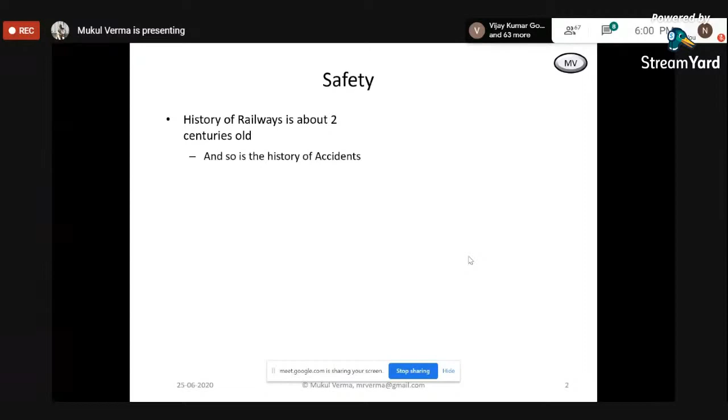This was the first train in the world which ran between two cities, and it met with an accident. So accidents are part of all modes of transport. Our endeavor is always to minimize the risk. What is risk? We will see. Risk is a combination of severity of an accident and probability of accident.

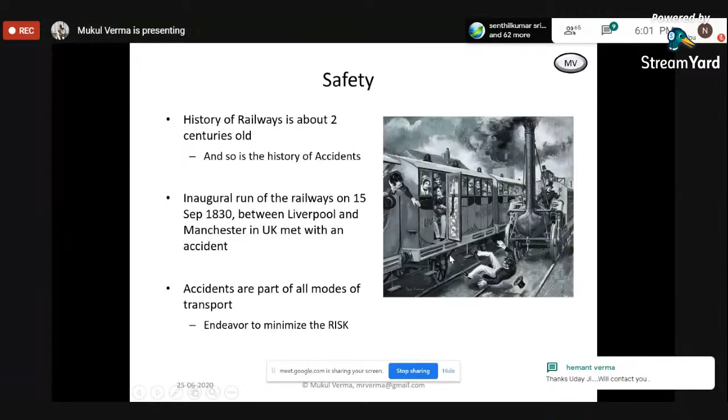So we will see some important issues on safety. That is, first thing is, what is safety? We will try to define safety. Can we quantify safety? Well, why do we need to quantify it? Unless we quantify, we don't know where we are and where we have to go. Have we improved? So to measure all these things, it is important to measure safety.

As Dr. Chaturvedi in the previous session said, we have to quantify quality. Similarly, safety has been quantified, and we will later on see that it has been quantified into 4 levels universally for all modes of transports, whether it is road vehicle, whether it is aerospace, or whether it is railways. This is safety integrity level 1, 2, 3, 4. And the level of safety is decided based on the severity of consequence of accident.

Next question is, can we achieve 100% safety? Well, answer is no. There is some accepted level of risk which has to be taken depending on the society. Every society, every country has its own minimum accepted level of risk, and safety is only an insurance that you will not have more than the small amount of risk that you have already accepted.

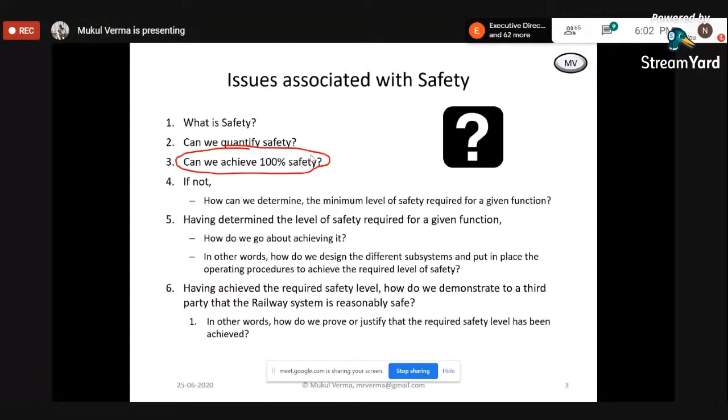Well, if 100% safety is not possible, then how can we determine what is the amount of safety we need for a function? For example, in the railways, there are different functions like signal clearance, giving command to the interlocking system, and so on. For this, our safety standard CENELEC provides guidelines to decide what level of safety is required for which function. We will see about CENELEC later.

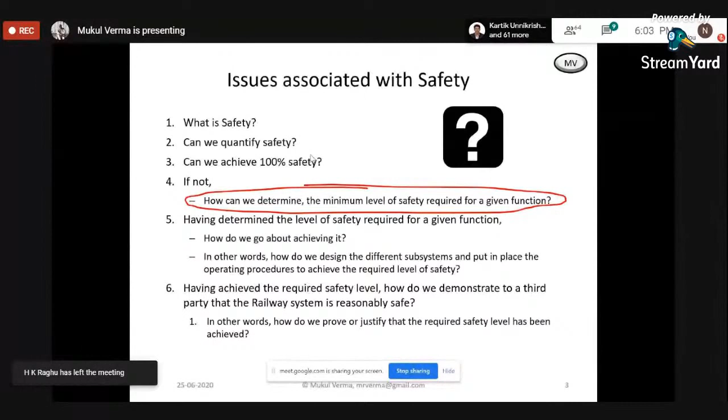Then, having determined the safety level, how do we go about achieving it? In other words, how do we design different subsystems and operating procedures to be put in to achieve the required level of safety? Again, CENELEC comes to rescue, and CENELEC is, well, not universally, but at least in India and Europe, the Bible for railway safety. So CENELEC gives the guidelines to decide how to achieve a given safety level.

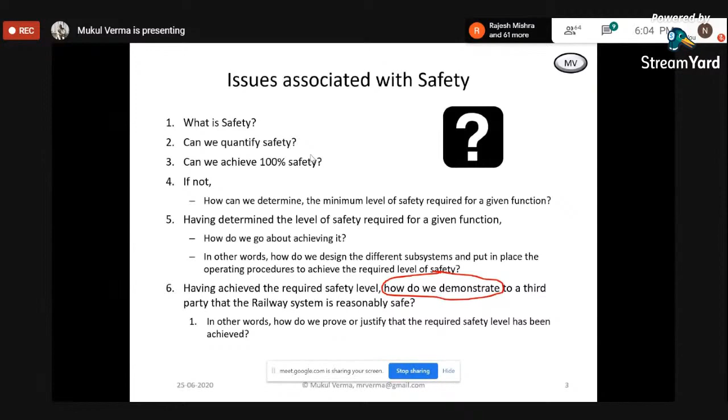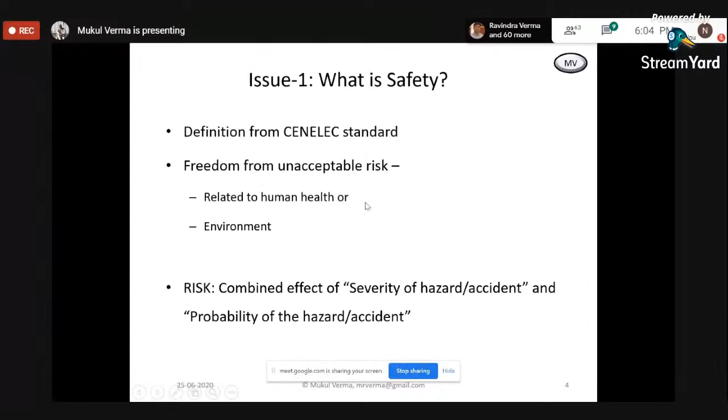And having achieved the safety level, we have to show to the customer or to the public at large that we have achieved this safety level. So CENELEC provides the guidelines how to achieve and how to demonstrate the safety level. So issue number 1, we will see what is safety. Safety has been defined in CENELEC in just a few words: freedom from unacceptable risk related to human or environment.

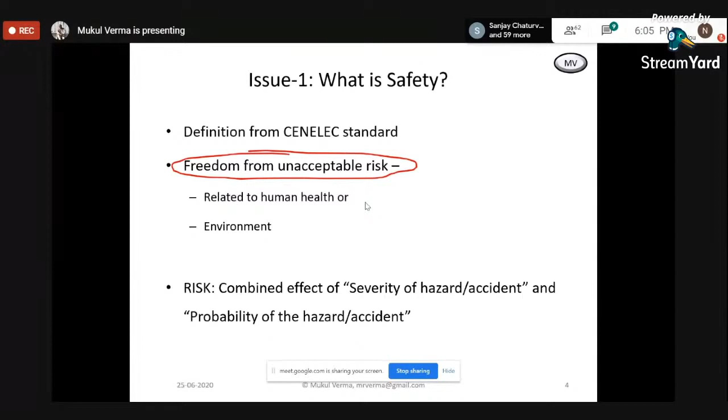Now, there is a key word here. This is unacceptable. That means, as we discussed earlier, some amount of risk has already been accepted by the society. And when we talk of safety, we only make sure that we don't increase the risk beyond what is already accepted by the society. And we have seen earlier that risk is the combined effect of severity of hazard or accident and probability of the hazard. Well, hazard is a technical term. Hazard is a situation where there is a possibility of an accident.

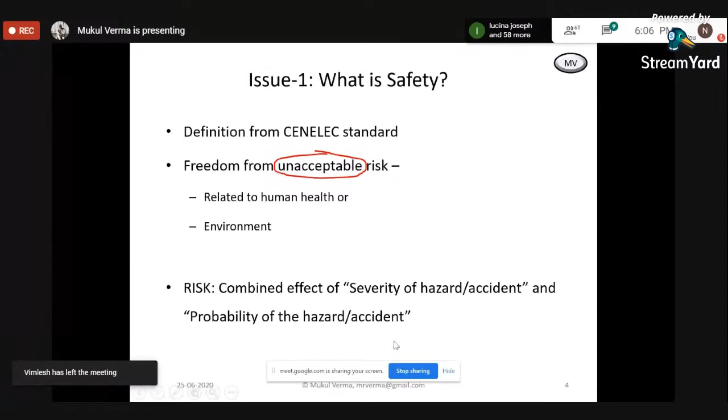So let's say in plain words that risk is the combined effect of severity of an accident and probability of an accident. If the severity is very huge, then we have to reduce the probability of that accident to the acceptable level. We have talked about CENELEC. Here, I would like to spend a few minutes on CENELEC because this is very important for the railway engineers.

CENELEC has got 4 standards. The first is EN 50126. This is for railway applications. This is for the complete railway domain, whether it is signaling, rolling stock or track. 50126 applies to the complete railway application. It has got part 1, which defines the RAMS process. So this is not only for safety, this is for reliability, availability, maintainability, and safety. And part 2 deals particularly with safety. So these 2 parts are applicable to the complete railway domain.

Then there is another standard, that is 50126 part 3, which is a guide to the application of 50126 to rolling stock RAMS. This applies only to the rolling stock domain. Apart from this, there are 3 standards which apply to signaling systems. 50129 particularly provides the guidance for electronics hardware as well as the system. I have seen 50129 being applied to rolling stock also. So people have started using this for rolling stock also.

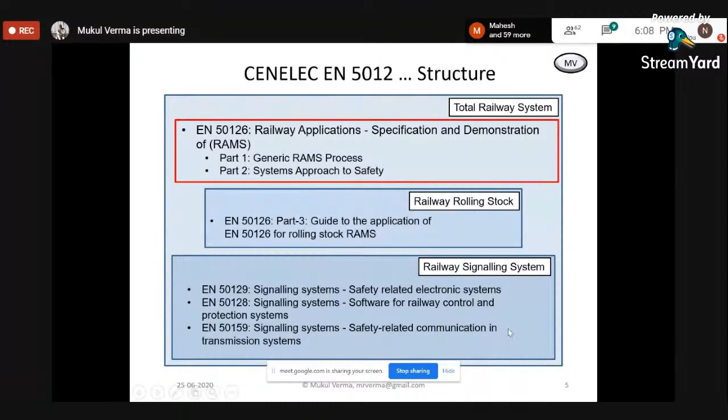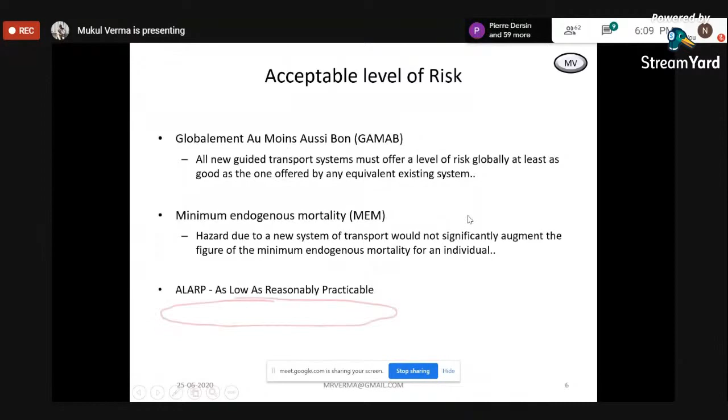Then we come to the acceptable level of risk. We have talked that every society has got its own acceptable level of risk. It has decided, and the risk should not be higher than this acceptable level. There are various methods various countries have applied. Generally, the most popular one is as low as reasonably practicable, the ALARP method. This is a very popular method, and in India also we are following this method. We will see how this method is applied.

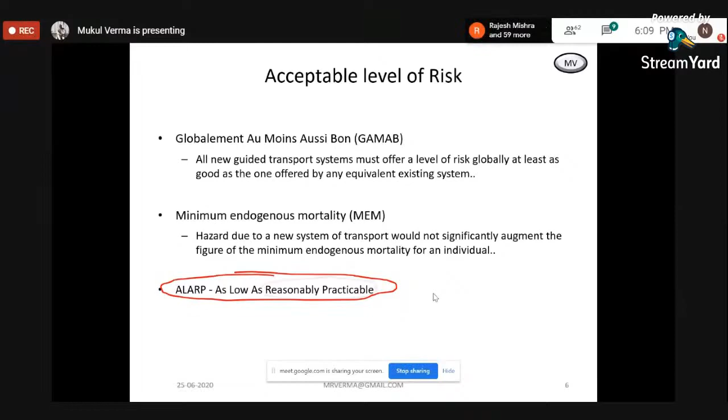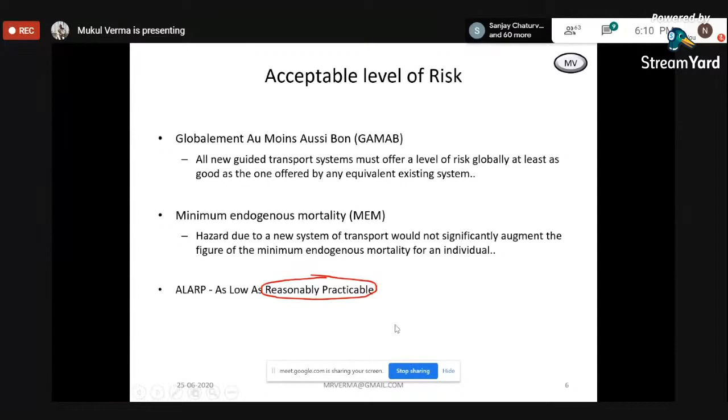Here also kindly see the key word, that is reasonably practicable. Again, the risk is not to be reduced to 0. We need to reduce it to the reasonably practicable level, which is acceptable to the general public.

Next issue is safety quantification. I mentioned that safety has been quantified into 4 levels. These are level 1, 2, 3, 4, highest being level 4. So for any hazard or any accident, we look at the most possible severity of the accident. For example, suppose there is a hazard in which conflicting signals have been cleared for two trains. There may be head-on collision, there may be side collision, or there may not be any collision at all if there is no train. So we look at the highest possible severity, and that is head-on collision.

Since this cannot be accepted, its probability has to be brought down to a very low level, and that is given in CENELEC as less than 10 to the power minus 8 per hour, which is about 1 in 10,000 years. Similarly, for other things, for example, doors of a metro train opening in a moving train is not a good thing. It is not acceptable, but the consequence is not as severe as the other one. Probably this is assigned safety level 3 or 2. This is a subjective matter, and the probability of its occurrence is reduced to less than 10 to the power minus 7 or minus 6, and so on.

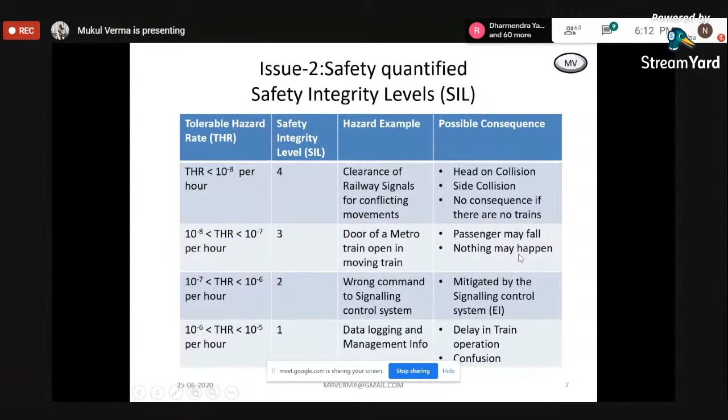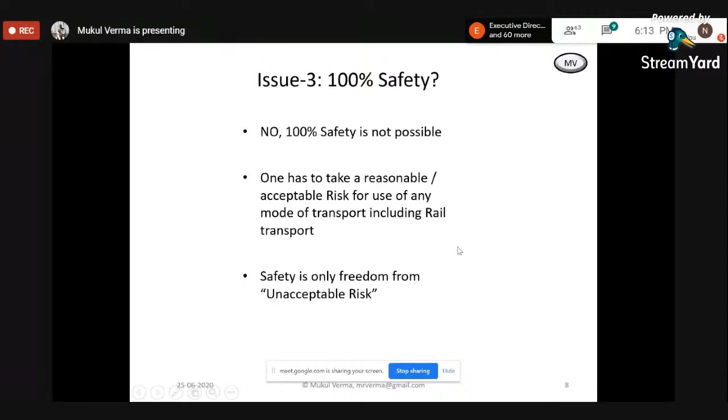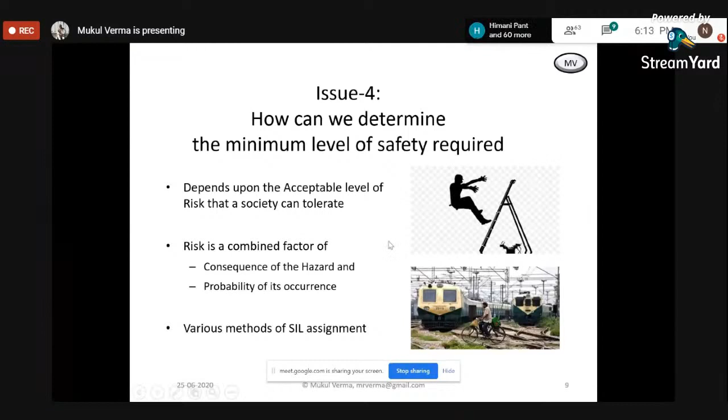Well, issue 3 we discussed was, is 100% safety possible? This has already been answered. No, 100% safety is not possible. Some minimum amount of risk has already been accepted, and we can bring down the risk to that much amount. The next issue is, how can we determine the minimum level of safety required? Well, we have seen some methods of determining the minimum level of safety, and one of them was ALARP, which can be applied for determining the safety level.

Now we come to how to achieve the required level of safety. Again, CENELEC has got such guidelines. If you follow those guidelines, you will achieve the safety integrity level. For example, for products, it has given a quantitative requirement, which we saw for SIL 4 was 10 to the power minus 8 per hour. We have to bring the probability of such failures to less than this. And there are some qualitative requirements. In the example of metro rail, the safety is allocated to different subsystems, for example, signaling, rolling stock, etc. And each subsystem is required to demonstrate that the required safety level has been achieved.

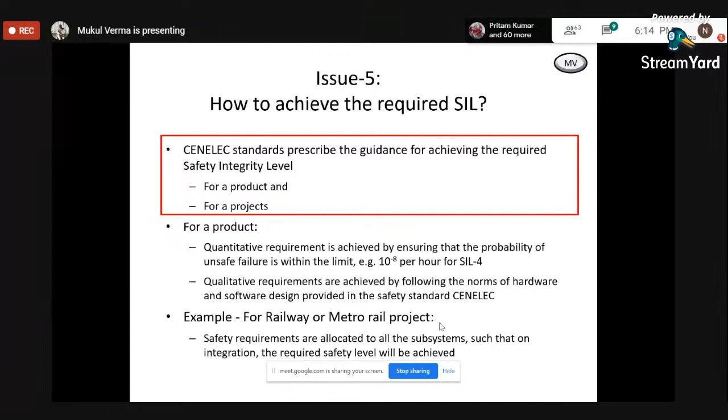Then the last issue was, how do we demonstrate that the required safety level has been achieved? Well, all documents have to be prepared. You have to give a justification. You have to calculate and show that the probability of failure has been reduced to 10 to the power minus 8 per hour for SIL 4, and maybe 10 to the power minus 7 for SIL 3, and so on. Documentary proof for quantitative requirements as well as for qualitative requirements, that you have followed all the guidelines, for example, that a safety audit has been performed, that your design engineers are well qualified, etc.

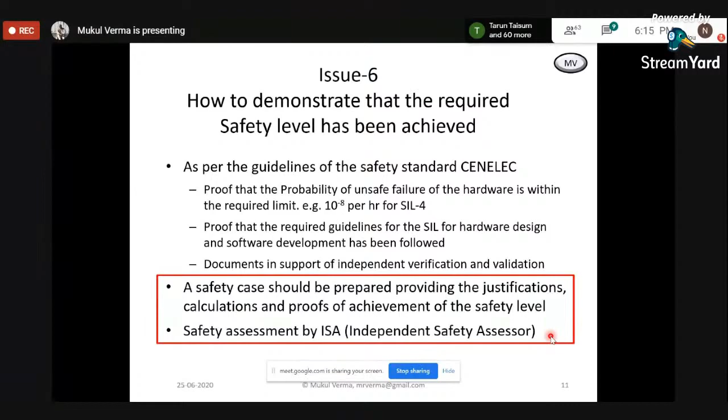Giving all these things, a safety case is prepared and put up to an independent safety assessor who assesses everything and then certifies the system to be safe at the required level. So these are all the 6 issues which I wanted to touch upon.

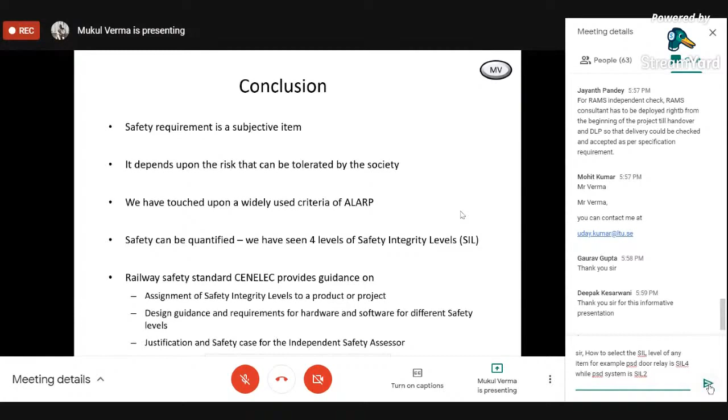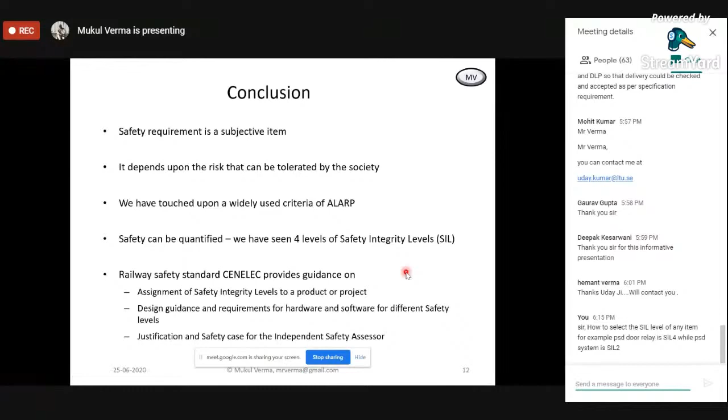And concluding my lecture, I would like to say that CENELEC is the Bible which guides us in determining what minimum safety level is required, how these levels are to be achieved, and how we justify that this safety level has been achieved. And the level is normally decided or determined by methods like ALARP. Thank you.